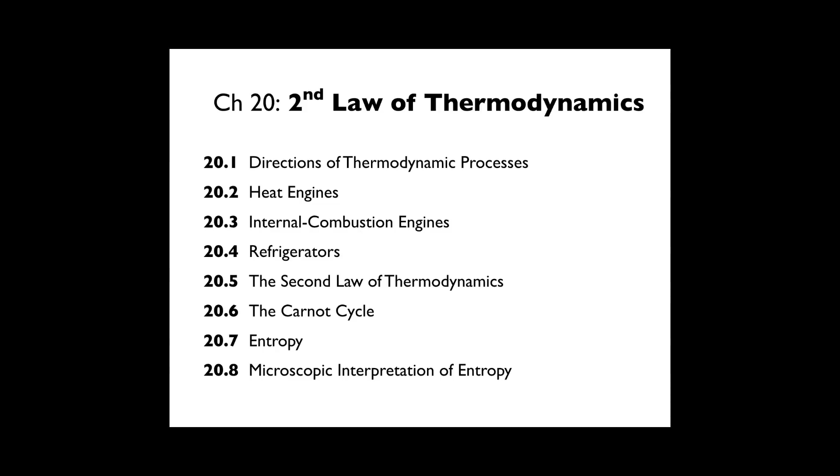All right, so let's start.

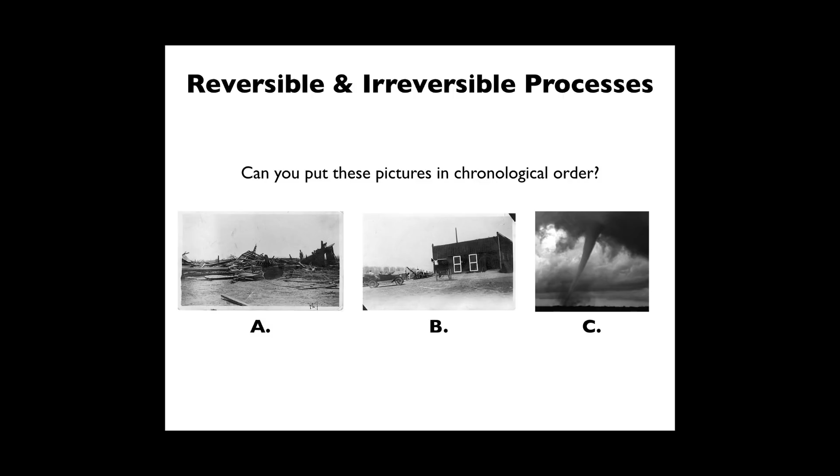Just like that, if you look at these pictures, can you put them in chronological order? This is an irreversible process, and we know, just from experience living in the real world, that the order goes B, C, A. The things over here form a very ordered system. Then you go to C, this is the energy you're adding to the system, and then you have A, which is a very disordered system. So we know things only really go from ordered to disordered. You're never going to have a tornado spontaneously go back to being ordered. So this is the difference between reversible and irreversible processes.

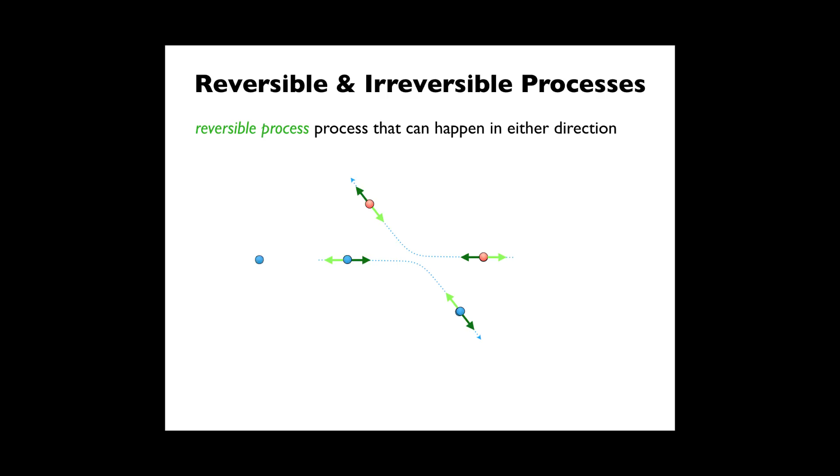A reversible process is a process that can happen in either direction. For instance, a collision like this, where you have particles coming in and interacting, is considered reversible because you can run it the other way and it looks pretty much the same as before. These are both processes that look okay, before and after. So you can run this either way and it's going to look exactly the same, forward or backwards. That's a reversible process. An irreversible process looks something like that.

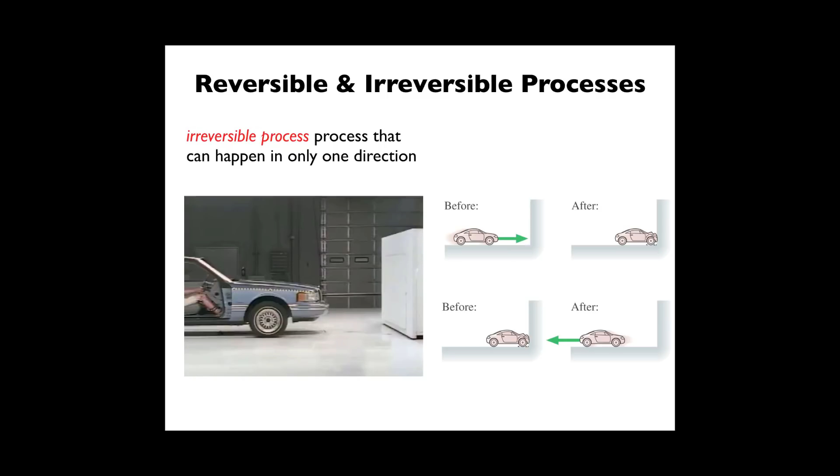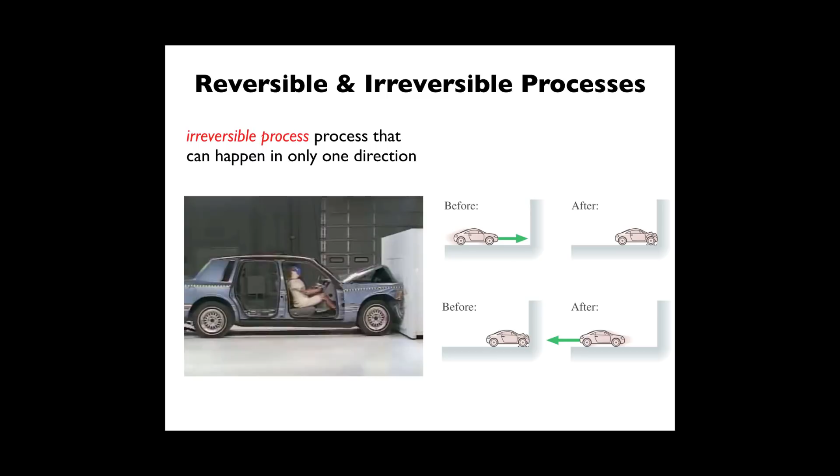It can only happen in one direction. Here, before and after are going to be very different. Before, the car is intact. After, the car is all smushed and there's stuff everywhere. You're never going to have a car with stuff everywhere spontaneously go back to being an intact car. It'll take lots of work and it'll never be quite the same. So this is an irreversible process, a process that can only go one way.

That would be really uncomfortable and weird, okay?

So let's move on to heat engines. How do we turn heat into work? The main problem in power generation is getting the heat. Once you get the heat, you can turn this into work, okay?

We'll talk about this in a minute. Work can be sorted into useful work, meaning mechanical work, like turning something or moving something up and down, or electricity, meaning the stuff that you get out of the wall. The way we get this work is either mechanical energy, so wind, water.

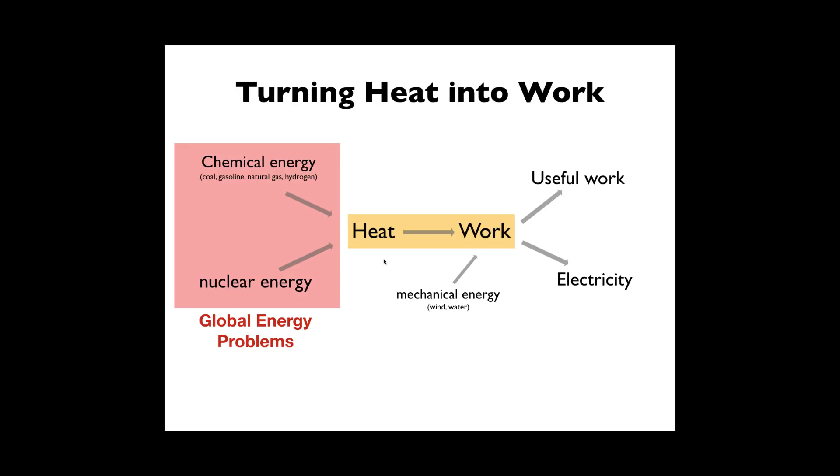So remember, work is defined as the integral under the PV diagram curve, okay? So for instance, work done by a heat engine, if you have your force coming from your gas and your force coming from outside as your environment, right? The environment can compress the gas, and that way your environment is in the same direction as your displacement. This is a compression. But remember, work system is equal to the negative work of the environment. So this is your work system, okay?

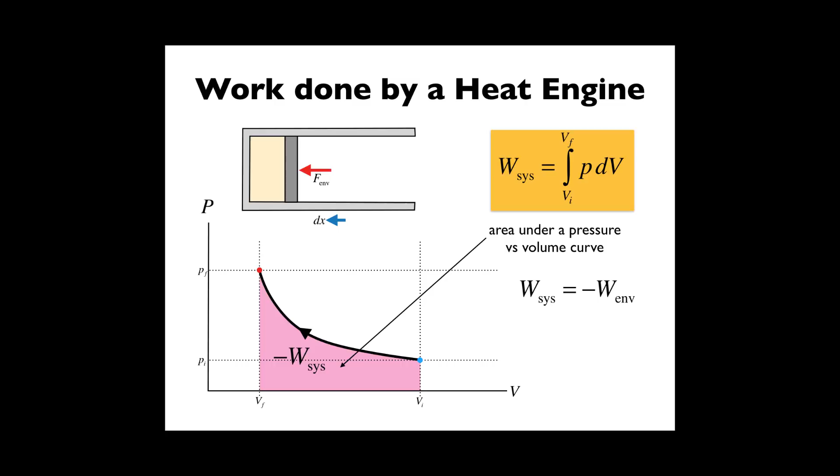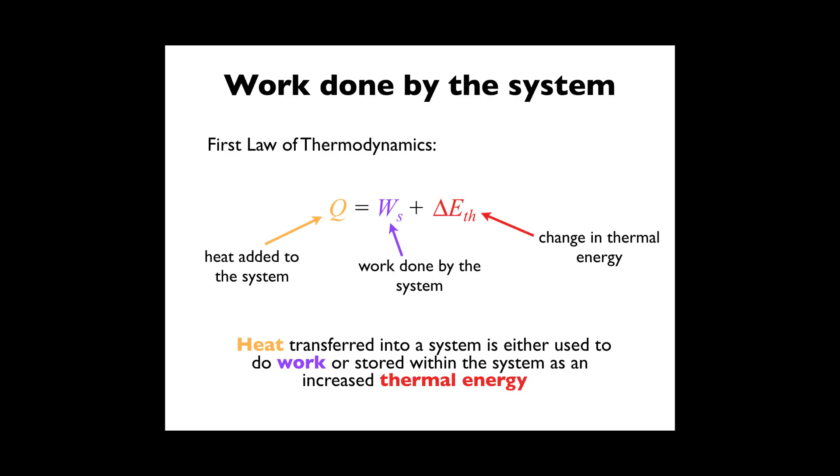Remember, heat transferred into a system is either used to do work or stored within the system as increased thermal energy. And what we care about is the work that these systems do. So let's talk again about energy reservoirs, okay? What happens if you throw this ice cube into the ocean? We talked about this a little bit earlier in chapter 19, but discuss this using terms we used in class.

So heat from the ocean water goes into the ice, okay? So that's a positive Q. It melts the ice, which changes the ice, okay? So it changes the way the ice is structured. It's a phase change, and then it also is kind of a volume change. Now, does this change the temperature of the ice? Well, yeah, it goes from freezing to whatever the ocean temperature is.

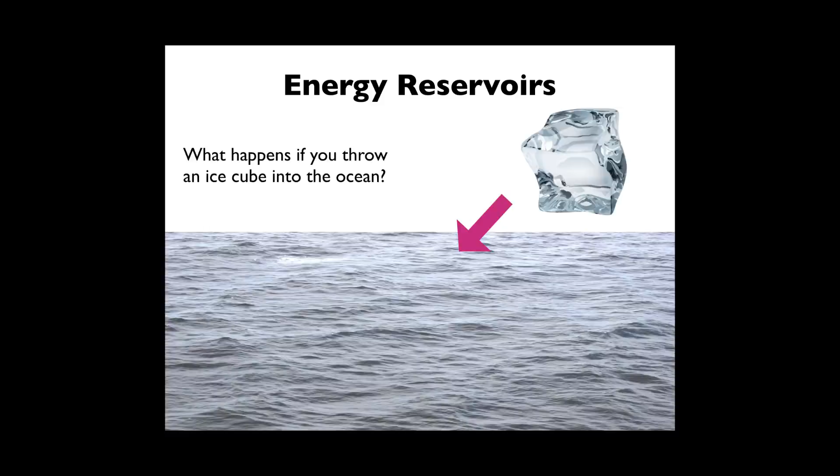But does it change the temperature of the ocean? Absolutely not, okay? So an energy reservoir is something where you can add or subtract heat from it. Q can go in or out, and it doesn't change the reservoir itself, okay? So an energy reservoir is something so large that the temperature does not change when heat is transferred. So remember, if heat's transferred into a hot reservoir, from the hot reservoir to the system, we're going to talk about hot and cold reservoirs.

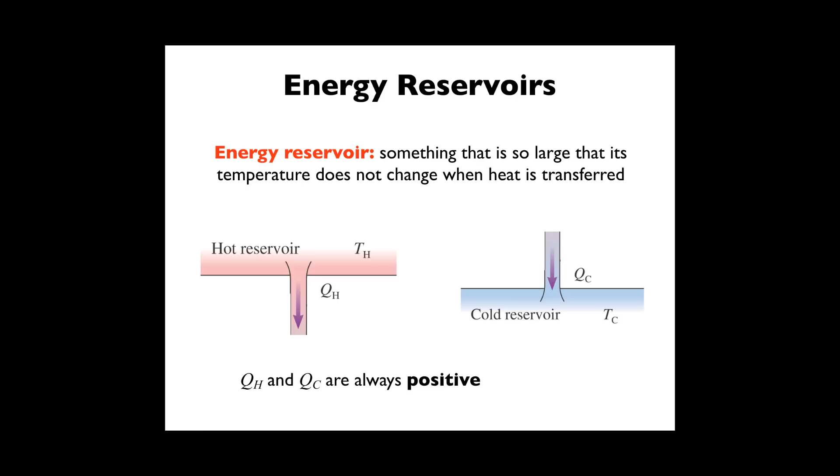If heat's transferred from a hot reservoir to the system, we call that Q sub H. If heat is transferred from a system to a cold reservoir, we call that Q sub C. Remember, these are always positive, one goes in, one goes out. This is different from how we've treated heat previously, where it was plus or minus depending on direction. Now instead of plus or minus, we call it QH and QC. QH is what we used to call plus Q, and QC is what we used to call minus Q. TH and TC are the temperatures of the hot and cold reservoir, and that gives you some change in thermal energy.

You can transfer heat into your system, you can transfer heat out of the system, and regular Q is the net heat transferred into the system. You have some going in, some going out, you subtract QH and QC, and that gives you Q. For instance, heat can be transferred into the system from a fire, and transferred out through ice. The hot reservoir is always drawn at the top, the cold reservoir always at the bottom.

If the temperature doesn't change, what's the relationship between QH and QC? We're not really changing thermal energy, we're not really changing work, so thermal energy is 0, work is 0, that means Q is 0, which means QH has to equal QC, unless you have some actual useful work going in and out of the system.

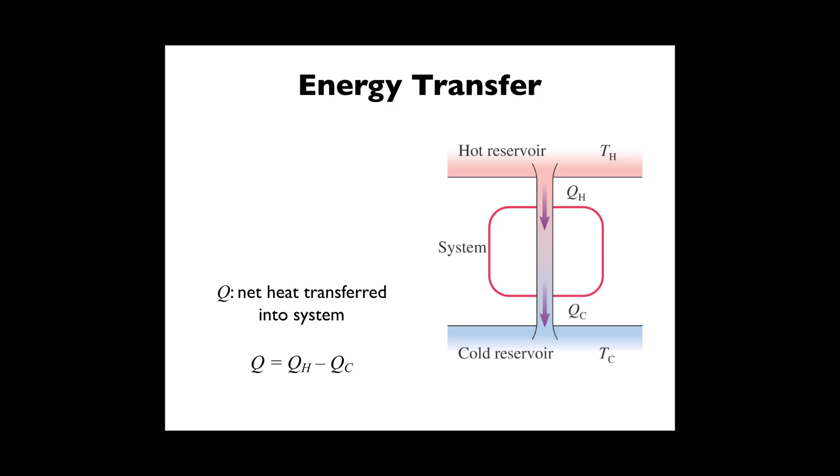So that's where we're at. If we want to turn work into heat, you can do something like this: take rocks out of the ocean, rub them together — that's work. You change the temperature — that's thermal energy — and then throw the rocks back into the ocean. That means your total change in temperature is 0. So we've converted work into heat, but this doesn't do any actual useful stuff. Remember, Q and work are the same, so work in is equal to QC. This is 100% efficient, but you can't actually use any of that heat or work to do anything.

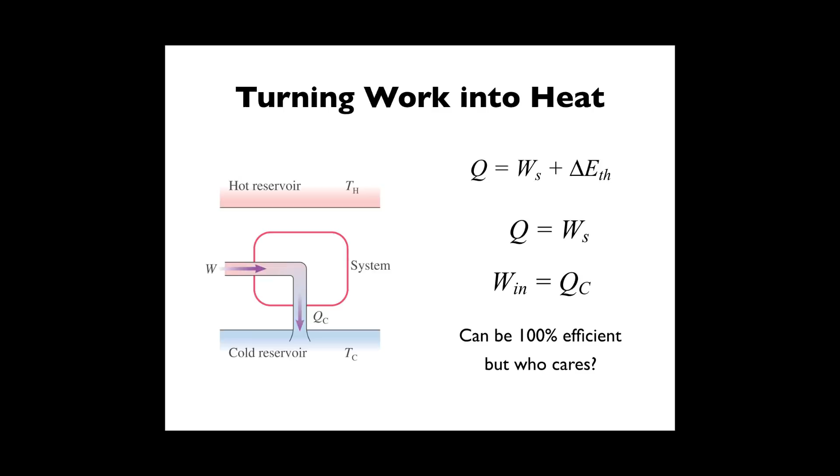So who cares? Let's move on and talk about how we turn heat into work — an isothermal expansion. Looking at the first law, for an isothermal expansion, what do we know about our change in thermal energy? It's isothermal, so our change in temperature is 0, which means our change in thermal energy is also 0. That means Q equals the work done by the system, which means in this case QH equals the work done by the system.

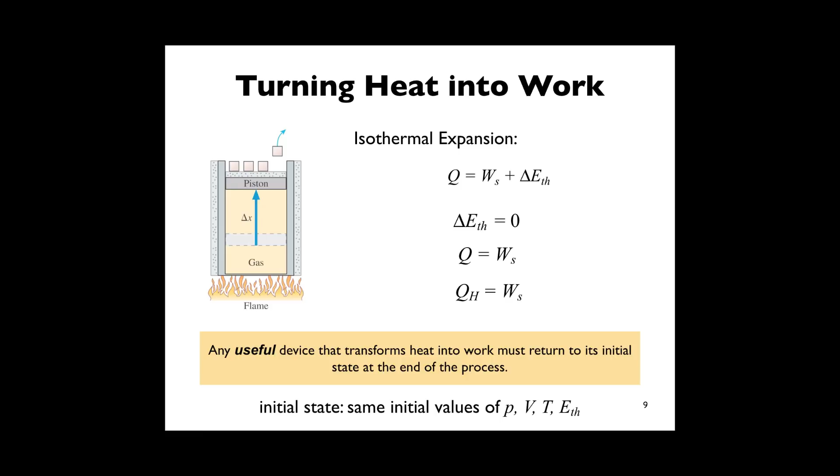Any useful device that transforms heat into work has to return to its initial state at the end of the process. We want cyclical things, and the initial state means it has the same state variables — P, V, T, and change in thermal energy. Heat goes in, gas expands isothermally, and all the heat is converted into work, but in this case the gas ends up in a different state. In an isothermal expansion, the temperature and thermal energy stay the same, but pressure and volume both change. So heat engines are closed cycle devices that have to return to their initial state — your engine isn't very useful if it can't repeat what it does multiple times. That means you have to start and end at the same P, V, T, and thermal energy.

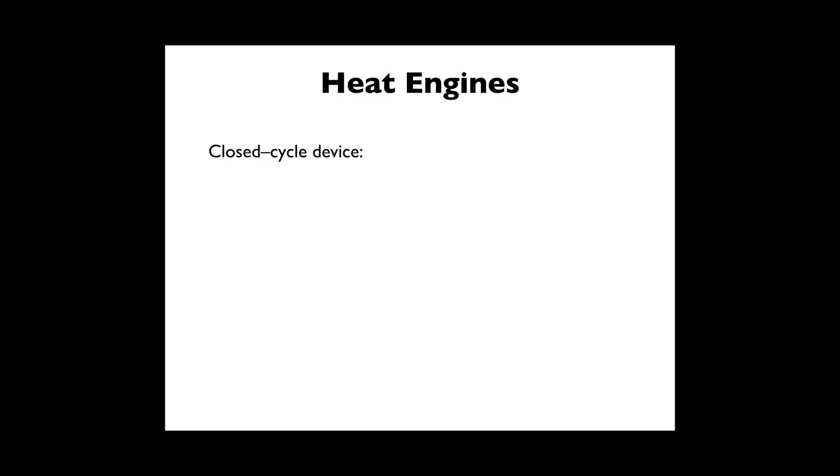A heat engine is a closed cycle device that extracts heat from a hot reservoir, uses some of it to do useful work, and returns some of it to the cold reservoir. Remember, Q equals QH minus QC. A closed cycle device means you start and end at the same state, so on a PV diagram it would start and end at the same point. That means your change in thermal energy is 0 at the end of a full cycle.

So that means your work out is equal to Q. This is the work done per cycle by a heat engine. Every time you have a cycle, you get a certain amount of energy out of your engine, and that's equal to Q, which is QH minus QC.

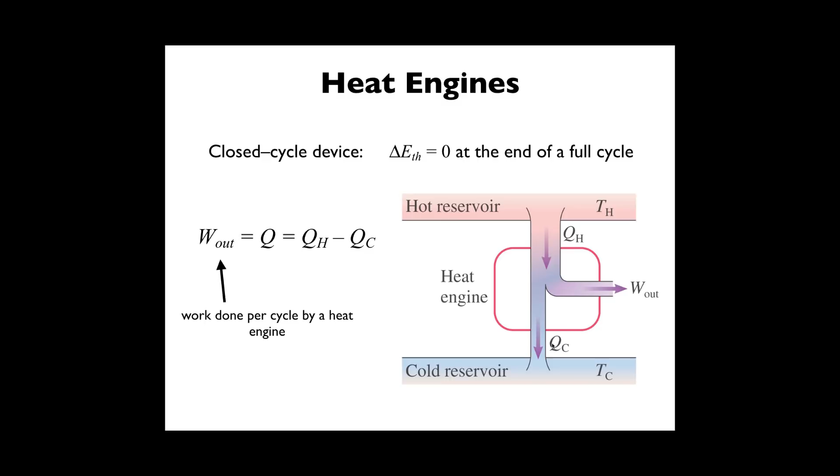So here you have your hot reservoir. You use that to transfer heat into your system, right here. That heat goes to both the output of work and to your cold reservoir. This is a little bit of waste, and this is what's used as useful work.

So efficiency is how much of the heat you put in is converted to work, because some of the heat's coming out and you're not using it in W. Your efficiency is defined as the total work divided by the heat you started with. So efficiency is work out divided by QH.

And because we know work is equal to QH minus QC, you can convert it to this: QH minus QC over QH. So this is just another way to write the same thing.

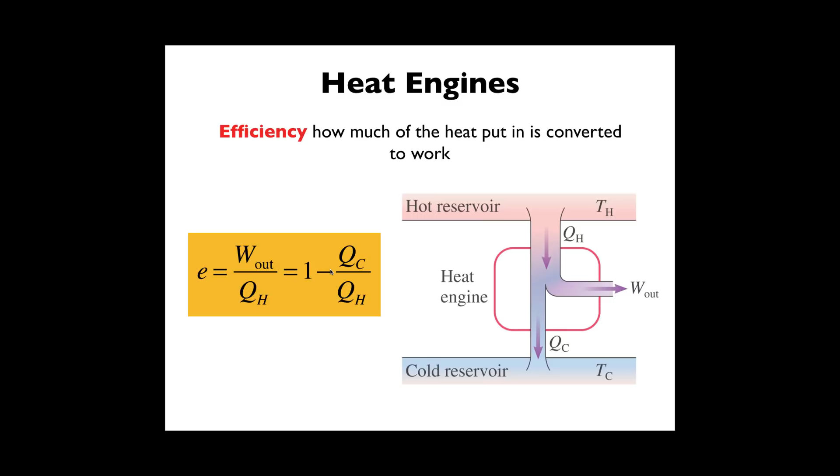So let's talk about heat engines. We need something cyclical, so here's an example of a heat engine. We'll start with our initial state: we have a gas in a cylinder with a movable piston, and the piston has a mass M on top of it.

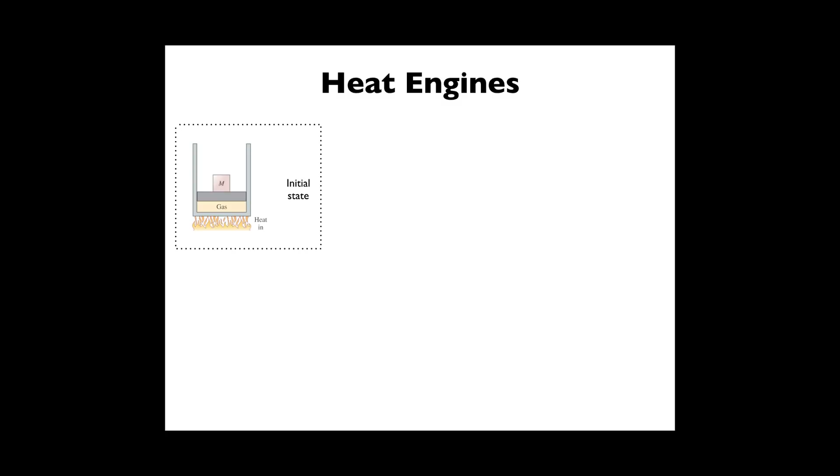Then we turn up the heat. Heat goes into our system, into the gas, and the gas expands. What's being kept the same here? We have the same mass on our piston in both cases, and we're adding heat. So this is considered an isobaric expansion, because pressure only depends on the cross-sectional area of the piston and the mass of the piston, and these haven't changed from this state to this state.

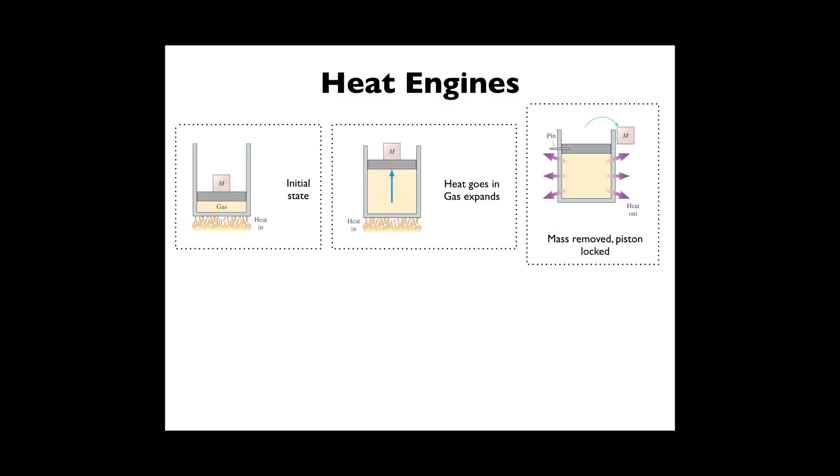Then you lock the piston in place, remove the mass, and let heat go out. If you lock the piston in place, the volume can't change, so this is isochoric cooling—heat's coming out, so you have isochoric cooling here. Then, if you slowly increase the external force, pushing down slowly, you cause a compression. That's an isothermal compression, and slowly is the key word here.

So we have isobaric expansion, isochoric cooling, and then an isothermal compression. Let's draw the PV diagram of what's going on here.

The PV diagram should look something like this. We start in this initial state. Then we use isobaric expansion, so you can see the pressure remains the same. There's heat going into the system coming from the fire, so that's heat in, and then we get to state 2.

Here you remove the mass, lock the piston, then you get isochoric cooling. Heat's going out of the system as you go from 2 to 3, and you can see it's isochoric because it's vertical. Then, last but not least, you slowly increase the force, meaning you have an isothermal compression, and heat leaves your system while you do this slowly.

So this is your PV diagram for this heat engine, and since you get back to the same state at the end, you can start this all over.

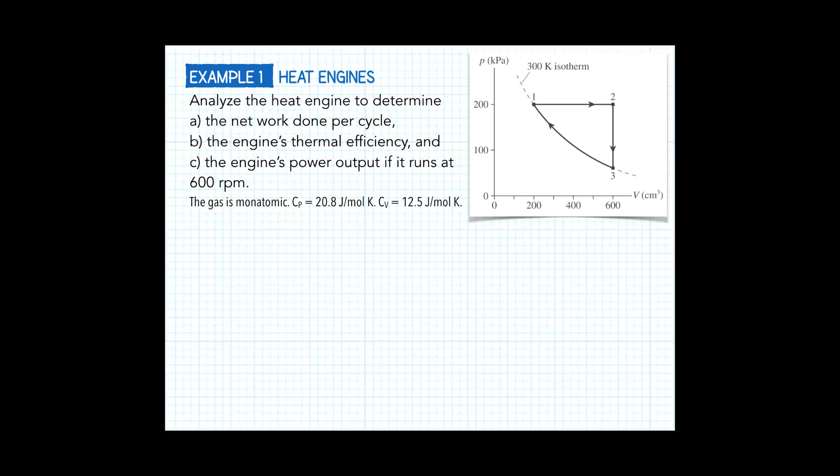So let's try out an example. We're going to analyze the heat engine to determine the net work done per cycle, and then we're going to see the engine's thermal efficiency and the engine's power output if it runs at 600 rotations per minute—so if it goes through 600 cycles every minute. There are some constants given here, and this is the same one.

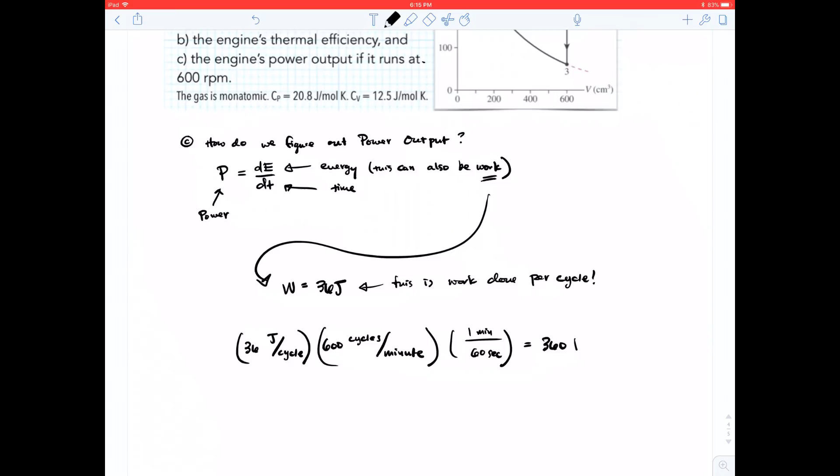that looks like this.

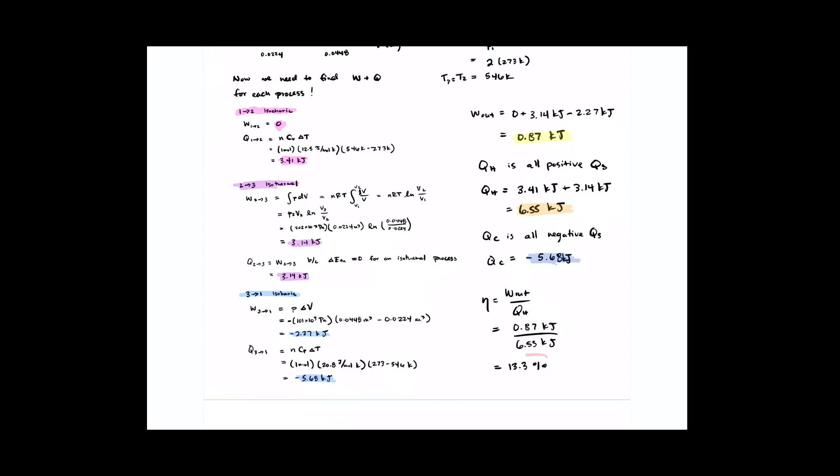About ideal gas heat engines. That means we're going to use everything we learned about PV diagrams for ideal gases, and we're going to figure out things like efficiency from our PV diagrams.

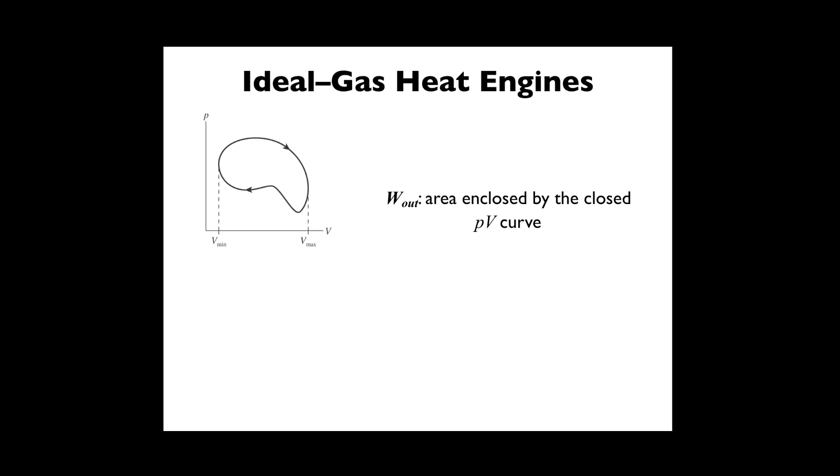Here's a cycle. You can see it's a closed cycle, meaning no matter where you start it, it'll start and end at the same point because it connects all the way around. Remember, work out is the area enclosed by the PV curve. Here's the work done during the expansion, and here's the work done during the compression. When you add your two works up to get your total work, that's your work out, the net work done by your system.

Here we want to figure out QH for this heat engine. What we're going to have to do is figure out the area inside the curve—that's the work. And then we know what QC is, that's going to be this plus this, because that's all the heat going out. We can use this to figure out what QH is, because we have this relationship, and we can also figure out the thermal efficiency.

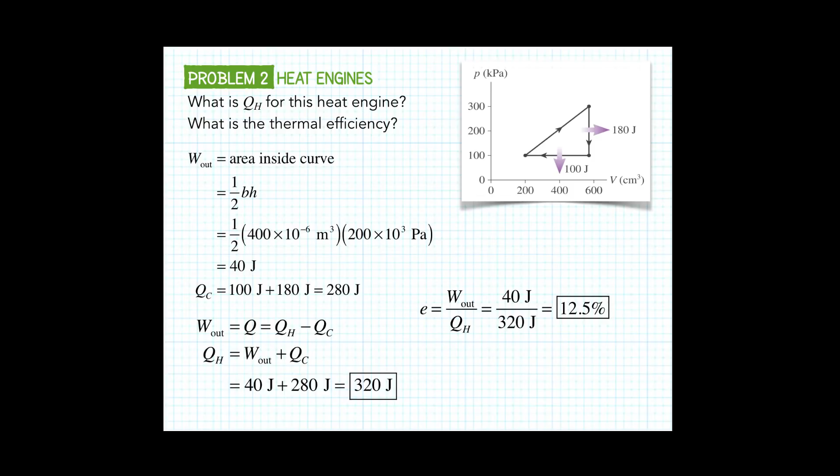Here's a little review on our ideal gas processes, everything we've learned so far in the past few chapters. Don't write this down, this is just a summary you can use when doing any of these problems. To solve heat engine problems, you want to start by drawing a PV diagram, using PV equals nRT and other equations to calculate your state variables, P, V, and T, and then use those to calculate Q, work, and change in thermal energy for each process. You can calculate QH by adding up all the positive Q values and calculate QC by adding up all the negative Q values, and you can end up with all the variables we're looking for.

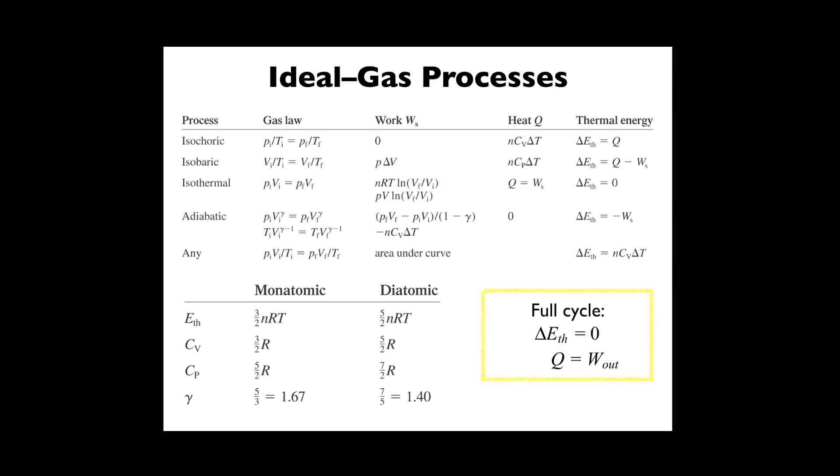Let's try applying this. We're going to start with the Otto cycle, for internal combustion engines. It's not spelled A-U-T-O, it's spelled O-T-T-O, but it does relate very much to the auto, the Otto cycle.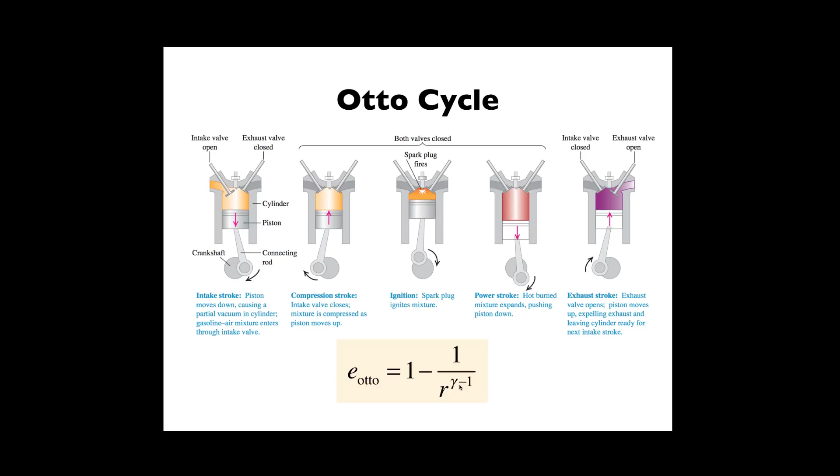And then from 4 back to 1, you have the exhaust valve open to allow temperature and pressure back to the initial values, but we don't really change the volume, all right?

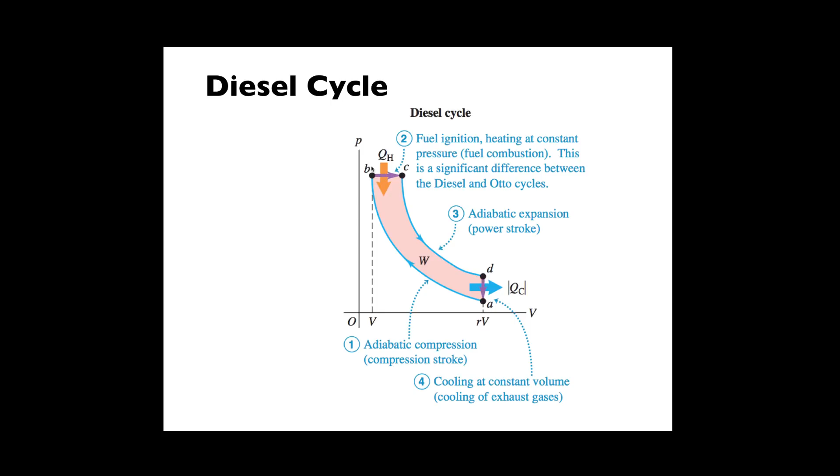Here's a picture of it. We're not going to go into the great details, but it's similar to the Otto cycle. We just have some subtle differences. So fuel ignition, meaning heating at constant pressure, is significantly different. Instead of having this part that's at constant volume for the Otto cycle, you have a constant pressure process for the diesel cycle.

Okay, let's talk refrigerators. A refrigerator is basically just a backwards heat engine. Work is done on the system to transfer heat from a cold reservoir to a hot reservoir. So instead of taking heat from a hot to cold reservoir and using it to do work, you put work in and move stuff from cold to hot.

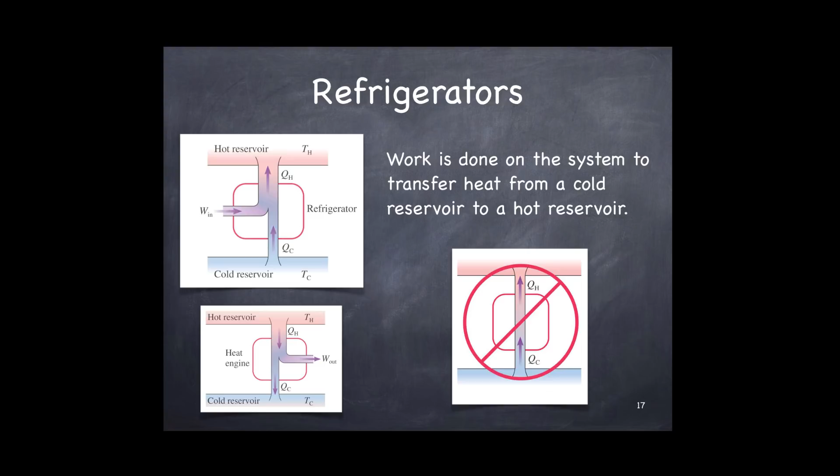Now you'll say, okay, well a heat engine does this thing over here, and a refrigerator does this. Why can't you connect them and get 100% efficiency? Well, it turns out that doesn't work. And this sort of explains it. So if this guy says, I don't have air conditioners, so I was thinking of just opening up my fridge to cool my apartment, what do you think? Do you think this is going to work? Okay, and the answer is obviously going to be no, but why doesn't this work?

Well, what happens outside the back of your refrigerator? What happens to the heat that we take out of the refrigerator? Well, that's expelled into the room, okay? So really, if you open your refrigerator, it'll cool the part inside the refrigerator a little bit, but the amount of heat that comes out of the refrigerator is always going to be bigger than the amount of heat that you pump out of it. So the net temperature of the room is actually just going to go up.

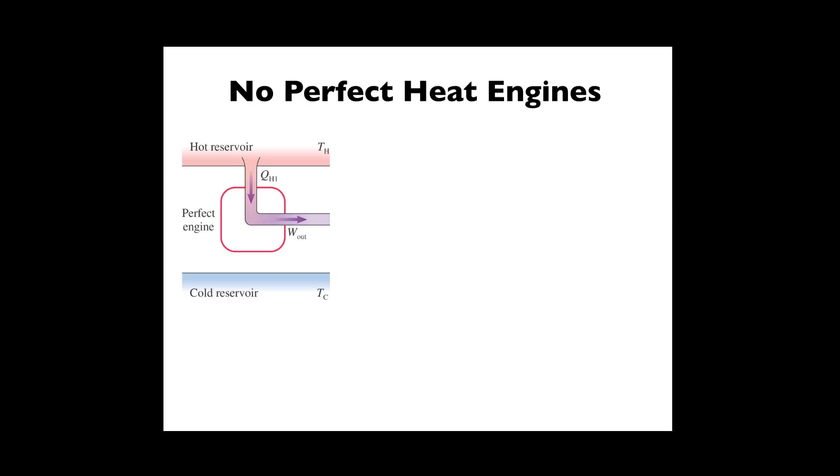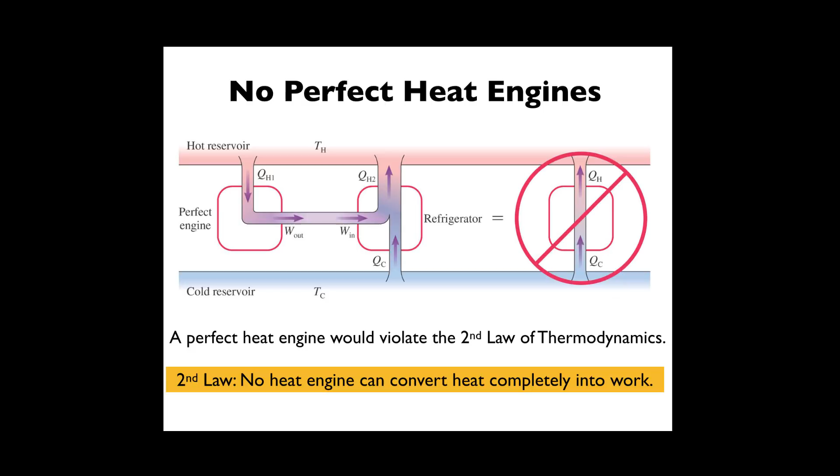All right, so let's talk second law of thermodynamics. One statement of the second law of thermodynamics is there's no such thing as a perfect heat engine, because a perfect heat engine would violate the second law of thermodynamics, okay? So no heat engine can ever convert heat completely into work. There's always some waste. There's always something in the QC, all right? So how do we, okay, so we want to know, if we can't get 100% efficiency, how good can we get?

And that brings us to the Carnot cycle. The Carnot cycle is based on a theoretically perfectly reversible heat engine, and it would be the most efficient that you could get for any particular thing. So Carnot efficiency is always the maximum efficiency you can get for anything. You can see here in the Carnot cycle, we start here and we only use isotherms and adiabats. So we only use isothermal processes and adiabatic processes, and these things can go either way.

So here we have our first isothermal compression. Isothermal compression means that we have QC going out, okay? Then we have an adiabatic compression, which has no exchange of heat. Remember, Q is 0 for adiabatic processes. Then we have an isothermal expansion, so we have heat going in, and then we have another adiabatic expansion, and that means there's no heat exchange, okay?

So we drew it one way, but we could definitely draw it going the other way, because all of these processes can be reversed. So Carnot is the same as reversible, and a Carnot engine with the same hot and cold reservoir temps will have the same efficiency all the time.

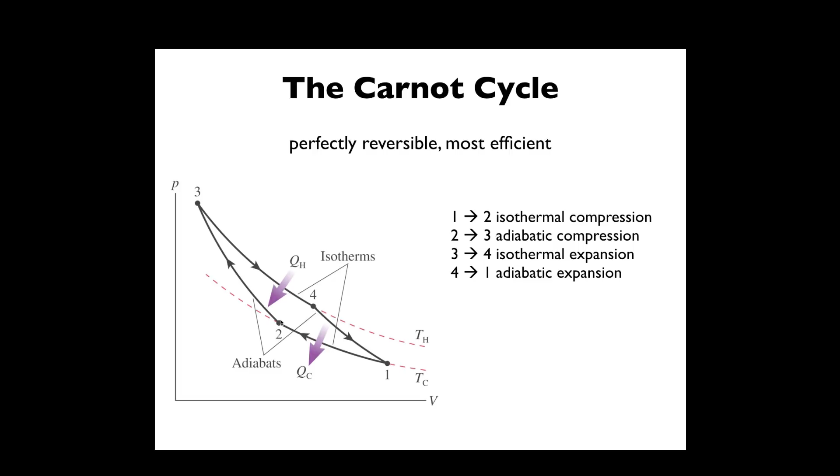Another statement of the second law is that no heat engine operating between TH and TC can exceed the Carnot efficiency. So here we can go through and calculate the Carnot efficiency from the Otto cycle engine from the previous example.

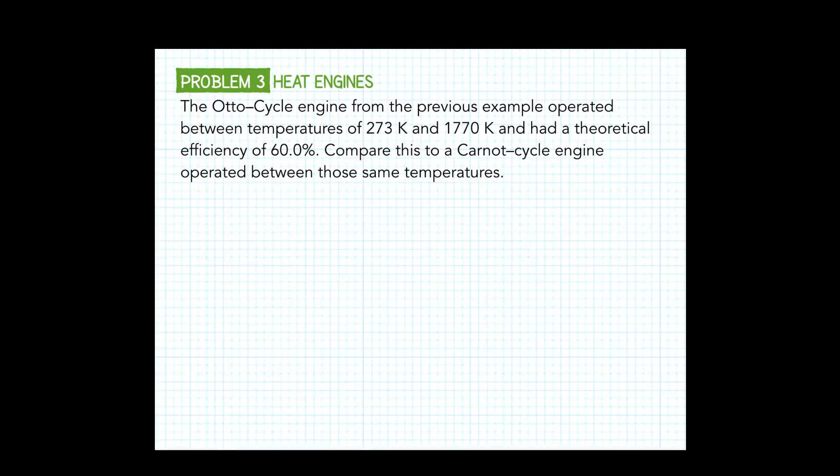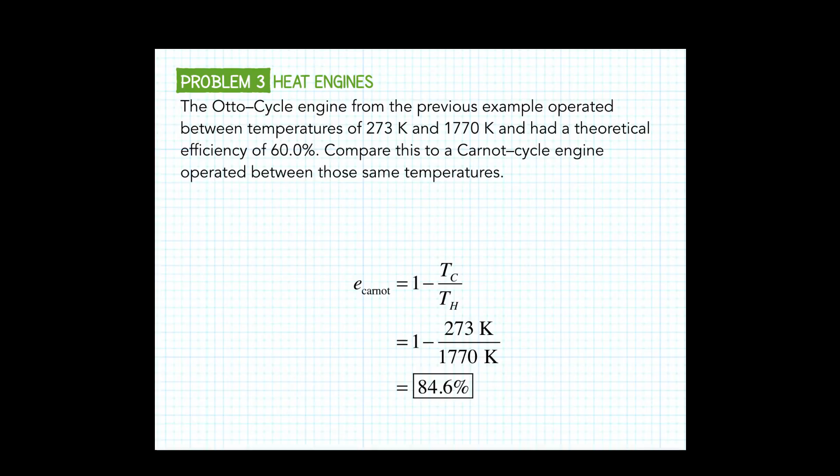We know that engine operated between temperatures of 273 and 1770 Kelvin, and it had a theoretical efficiency of about 60%. The maximum efficiency this engine could have, if adjusted to the best parameters, is the Carnot efficiency. Maximum efficiency is always the Carnot efficiency. Plugging those numbers in, we get about 84.6%. This means the maximum efficiency you could ever get from an Otto cycle engine with these temperatures is about 85%, and that's bigger than the 60% we actually got.

This heat engine is not physically possible to be built. It violates the second law of thermodynamics.

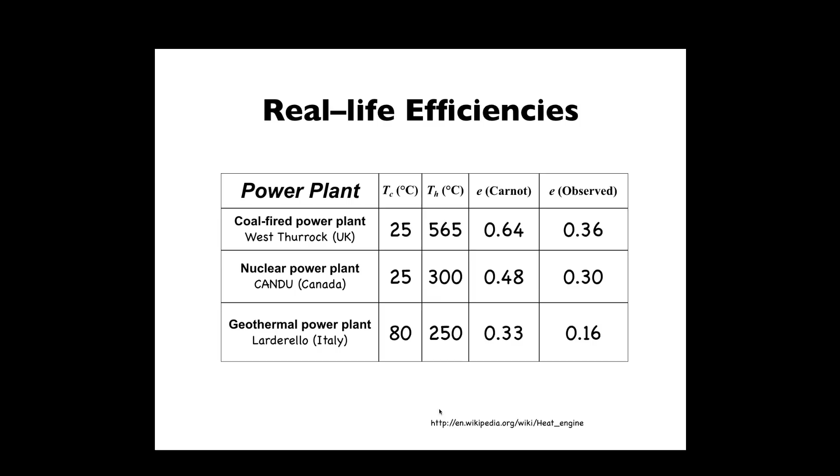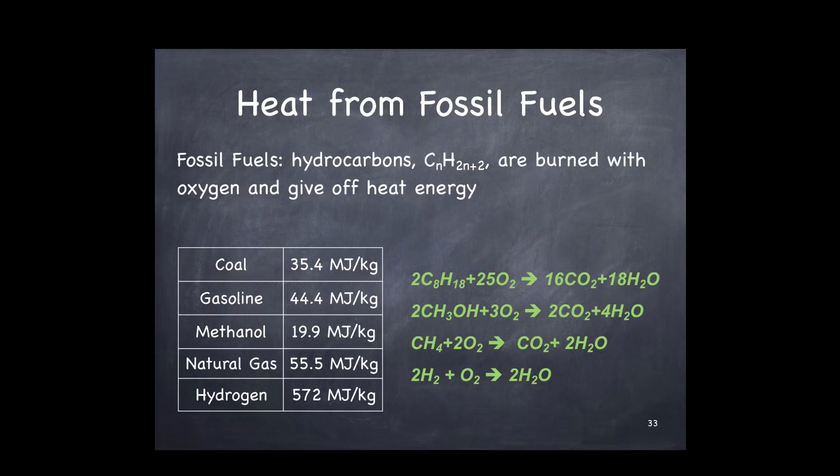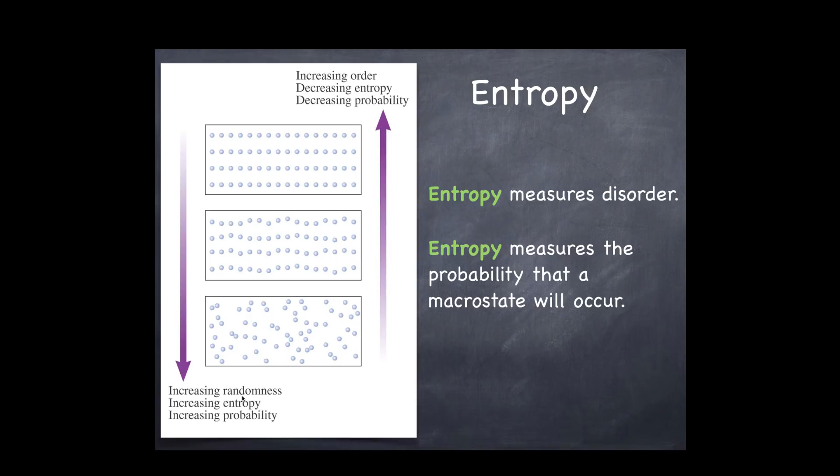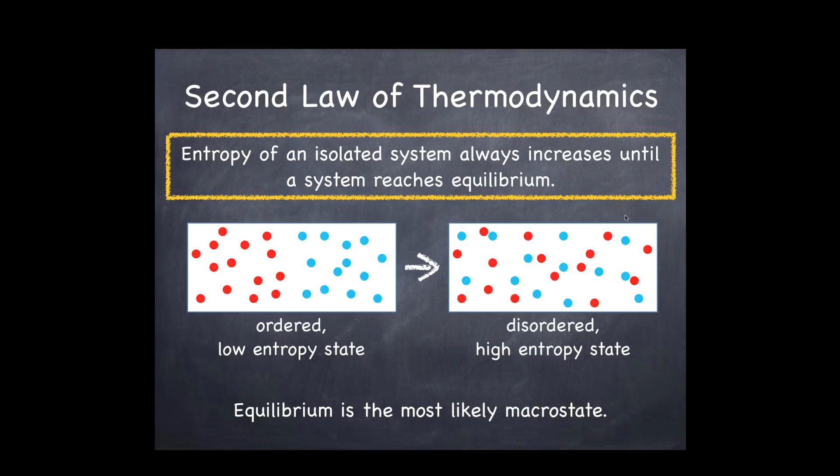The second law of thermodynamics, most formally, says the entropy of an isolated system always increases until the system reaches equilibrium. If we have this ordered low entropy state, and you take the wall away, this will eventually become something like this disordered, or higher entropy, state. This would be the most likely macrostate, this would be equilibrium, and that would sometimes mean thermal equilibrium. So the second law means entropy always increases until a system reaches equilibrium.

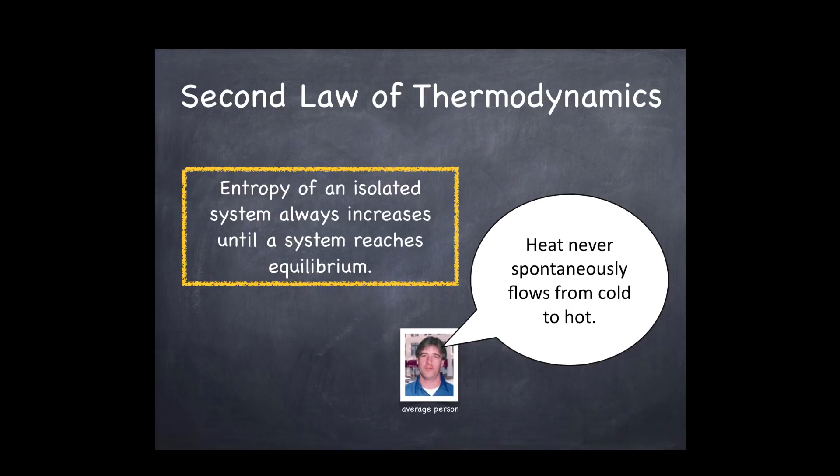And what that can be stated as is heat never spontaneously flows from cold to hot. Remember, heat never spontaneously flows from cold to hot. Heat always goes from hot to cold.

So here's a question: if a supersaturated sugar solution is allowed to slowly evaporate, we get sugar crystals that form. So sugar molecules go from a solution, a very disordered state, into a highly ordered crystalline structure. Does this process violate the second law of thermodynamics? Think about that for a minute, and then we'll talk about it.

Remember, the system also includes water. So even though the sugar is going from a high entropy state, in a liquid form...